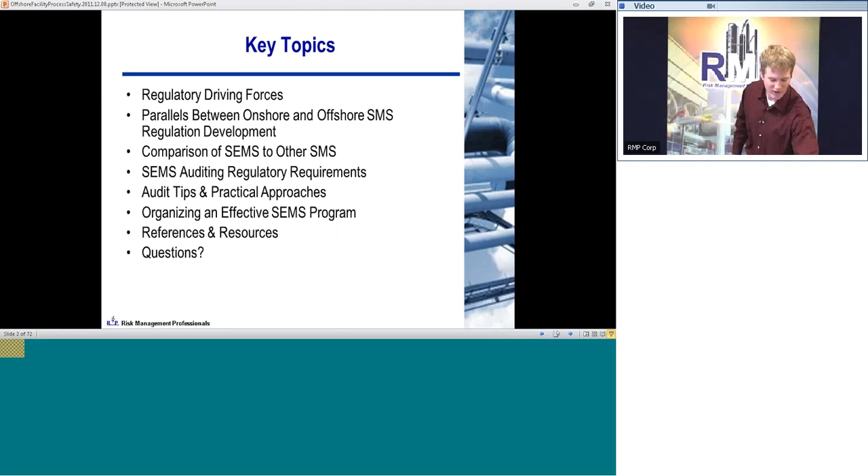Oh, sorry, I'm going to try and fix that.

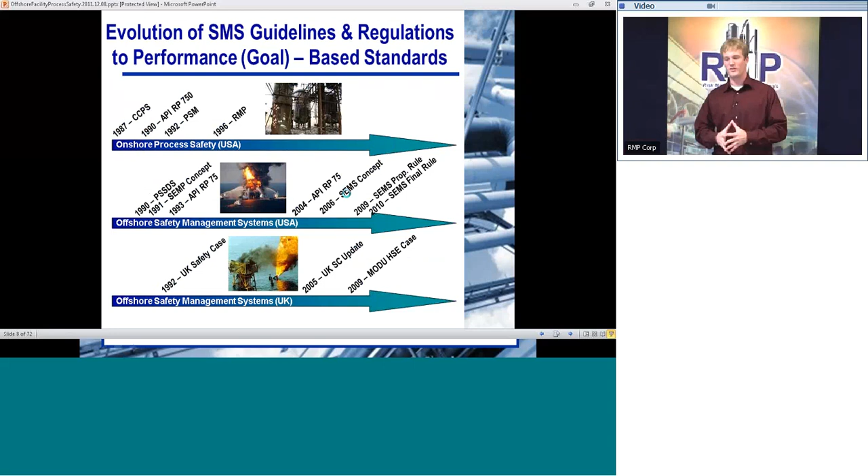Okay, and then if we keep going, it discusses how the management system mentality was created, how it compares to our OSHA, RMP, and then also, I like this slide, so I'm going to stop on it for a second.

It shows all the SEMS elements. The ones in red, for the purpose of auditing, those are what we found tend to get the most citations during audits - your hazards analysis, MOCs, operating procedures, mechanical integrity. Those you're going to want to really focus on, keeping good records, making sure there is a culture of documentation there so you don't get in any trouble.

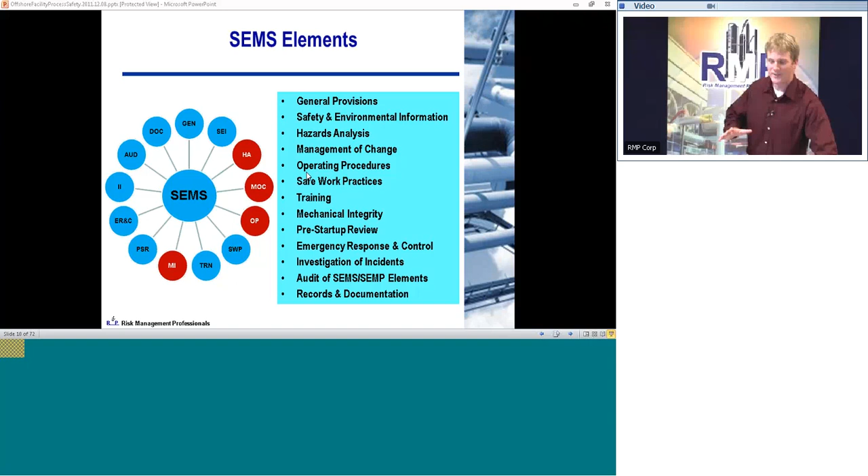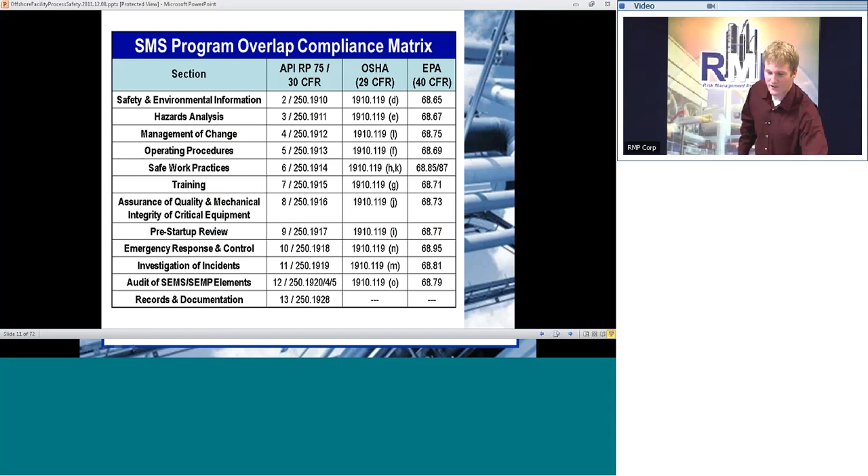Also, as we go through, this is a pretty nice matrix that you guys can look at in your own time, but it compares the different regulatory sections for the onshore and offshore, and that way it's a nice little reference for you guys. Okay, so now I'm going to get into the actual SEMS program audit requirements.

Here, for SEMS, it's going to be the same as with RMP and PSM, and that is 3-year intervals. However, it starts the second year after the initial SEMS program completion, which is a little different. That helps synchronize some of your major updates to whether they fall on the same anniversary date.

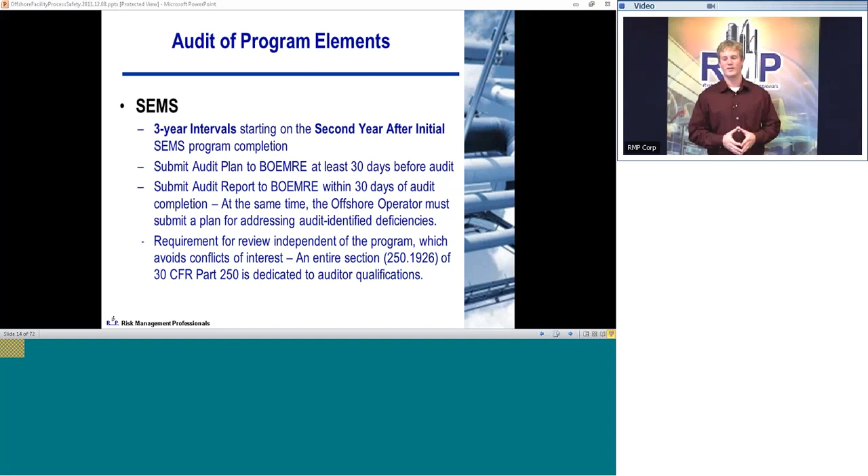Also, for the audit plan, you have to submit a plan to now BSEE at least 30 days before your audit. And then also, within 30 days after the audit, you're going to have to send back audit findings with a plan for addressing any deficiencies.

On top of that, there are some more requirements outlined in section 250.1926 that make it a little more specific in who you can pick as an auditor. You've got to make sure that they're independent. In the proposed rule, which I'm about to talk about, they go even further than that. You've got to make sure there is a neutral, independent, objective layer auditing your program, and not necessarily someone who put it together in the first place.

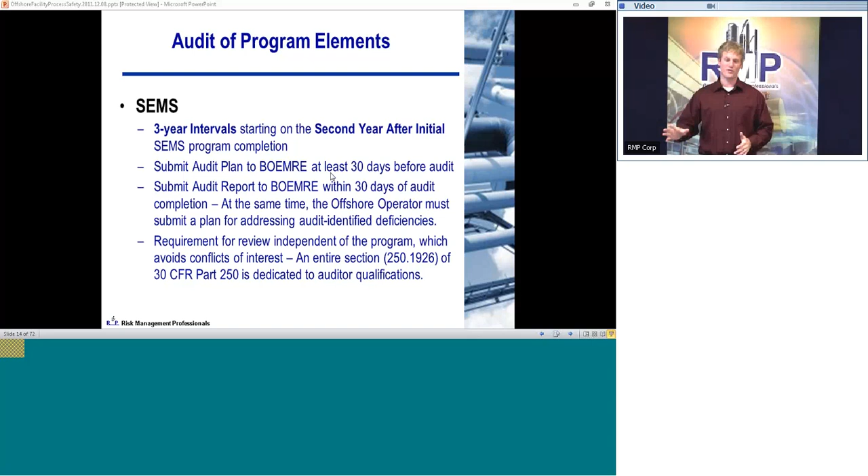It's kind of like after you proofread your own report 100 times, you're not going to see what's missing. You need someone else to come in and really do the auditing for you, either internal or external. However, looking at the proposed rule, that actually removes the option of using qualified operator personnel. So now it's going to be only independent third party that can perform the audit.

Okay, let's see if this works. All right, okay, so now I got my clicker back. All right, so we were looking at the proposed rule. What's going to change? No longer will an operator be allowed to perform the audit themselves. They're going to have to hire an independent third party.

On top of that, you're going to have to send to the BSEE your nomination for who will perform the audit, along with their qualifications, their experience, and then the BSEE will have to approve that audit. So that has to be done at least 30 days prior.

And then also, the auditor may not be involved in the development or the maintenance of the SEMS program. So from my reading of the rule, that means auditor or the organization. So if you have a consultant that does the audit, that organization cannot help in the maintenance and or development - that really provides a layer of independent objective analysis to your SEMS program.

And then, of course, looking at just the onshore PSM RMP, it's just triennial audits, and you have to retain the 2 most recent compliance audits. So it's a lot less prescriptive in that regard.

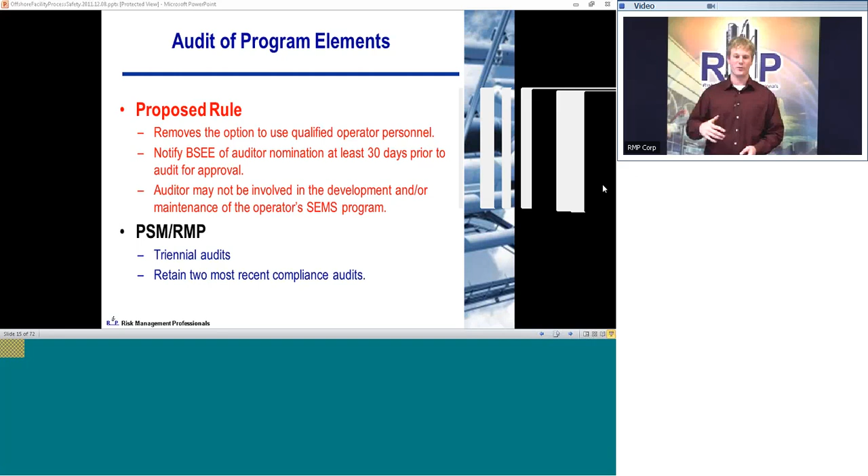So let's keep going. Now let's look at all of the SEMS elements. As I go through, I'll talk about some things that you can do for each element as an auditor, what you can ask for when you're on site, when you're interviewing someone. There are some good questions to ask, and also as an operator, good ways to make sure you're prepared so you don't have too much catch-up to do when it comes to your audit findings.

Okay, so first section: safety environmental. As an auditor, you're going to want to request this before you even get on site. This will help you get a nice lay of the land. You have arrangement drawings, structural drawings, you can get a layout, look at the levels, get an idea of major equipment, safety systems. Operators have a safety system diagram with evacuation routes, fire extinguishers, eye wash stations, fire eyes, life rafts, etc. That's good for them to have so they can hand it to you right when you get on site.

However, a lot of the information like block flow diagrams, P&IDs, all that stuff, as an auditor you can look at before you even get there. That way you don't have to waste time on site flipping through all that preliminary information.

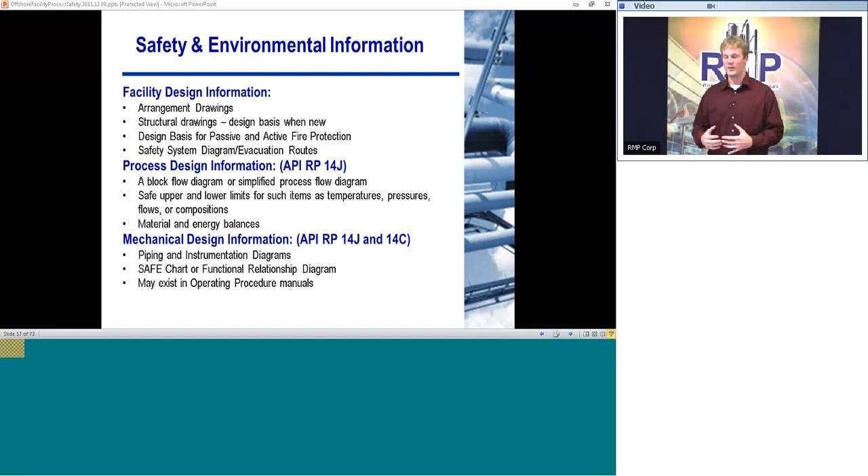Good things to look for in the P&IDs: do they look up to date? If there have been changes on the P&IDs, that could give you a nice thread. You could start examining MOCs. So, okay, I see that was changed. When you get on site, you can ask the operator, hey, where's the MOC for this? Okay, now that I have the MOC, I can follow that thread along.

How about the operating procedures? Did you do a JSA? Did you update your hazards analysis with this MOC? How about the PSR, the pre-startup review? You can follow that really well to see how their record keeping is, and see where the deficiencies lie.

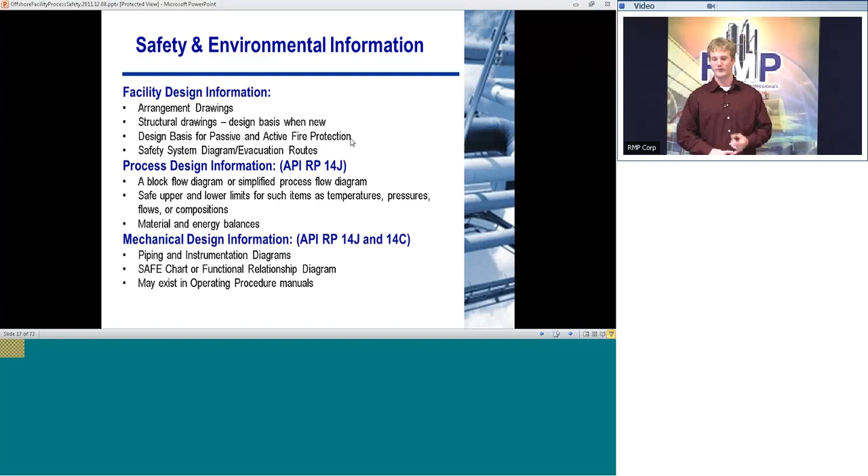Also, you can look at their existing safe charts. If we look at this example of a PFD, it gives you some good information there. You can see major pieces of equipment. As an auditor, you should have some idea of the process, and you'll know, okay, there should be safety systems there. That's something I can look at.

Same with the P&IDs. Good P&IDs, you're going to want to make sure, for instance, this PSV is labeled, has its sizing, flow rate it's designed for, and set point—that's good quality. You're going to want to make sure the P&IDs are up to date and have adequate information.

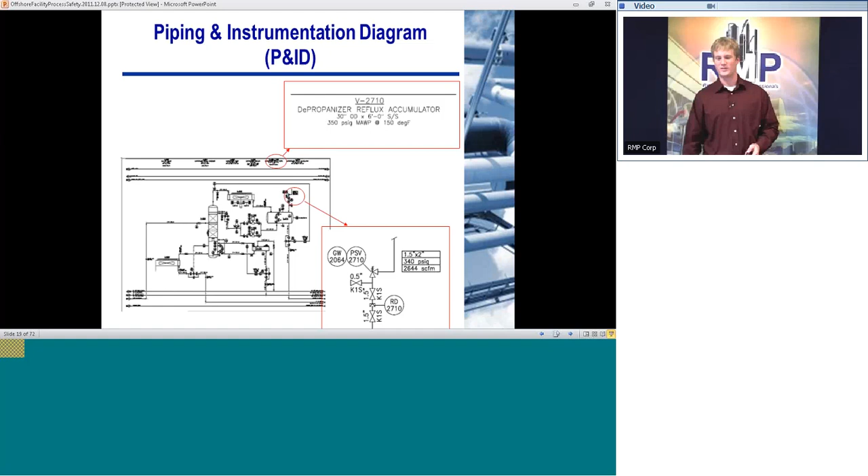And then an example of material safety data sheets, of course they've got to have those. Nowadays you've got to have MSDSs for even highlighters, I think, sometimes.

Okay, so hazards analysis—well, not as part of SEMS, but hazard analysis—this is where you have your safe charts. The proposed rule outlines a bit more in that: you want to identify your consequence, your safeguards, and have a risk rank. This is where you have your safe charts.

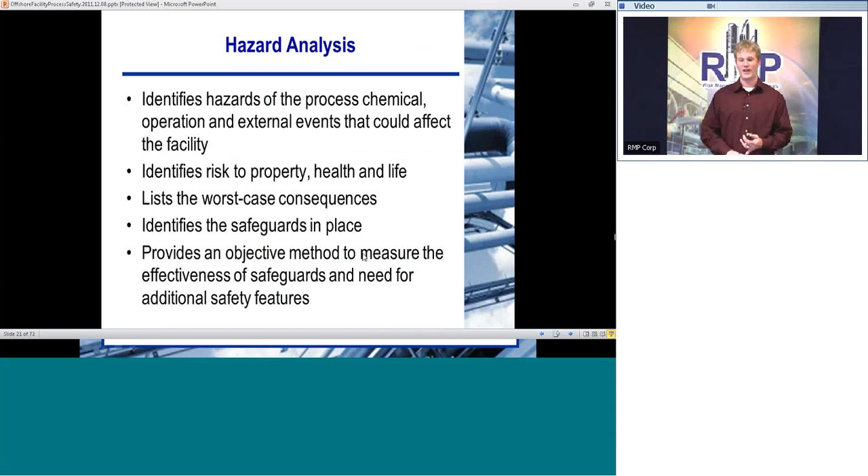You can also perform other risk analysis methodologies such as HAZOP, which on this next slide shows as you go from less effort on the left—what-if checklist combinations—to the right, where we have LOPA, fault tree analysis, event tree analysis. This graph is a little misleading in that it claims if you want to be the best you just have to do LOPA, but really, to be the best, you want to start on the left-hand side. You already want to have your HAZOP, your API RP14C review, and your simpler things done so that you can allocate your scarce resources of time to doing LOPAs and fault tree analysis on the most risky of the scenarios that have already come out of your previous hazard analysis techniques.

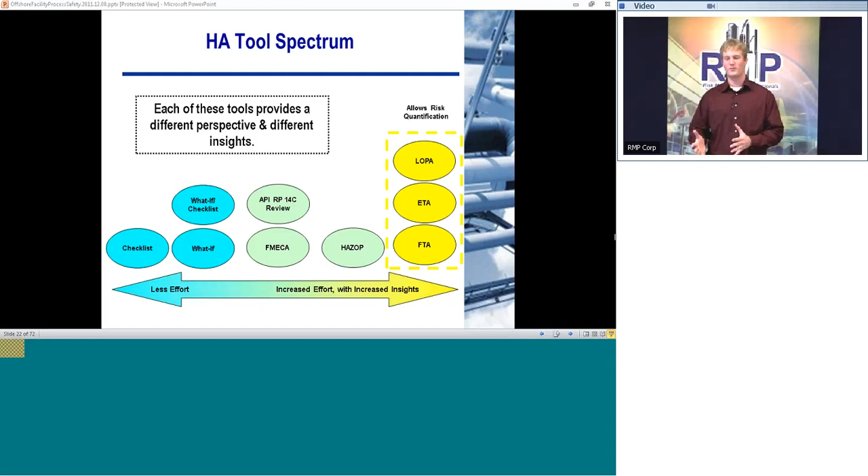All right, so management of change. As I already talked about in the safety environmental section, look for new pieces of equipment when you get on site—maybe scan around. If you see something with new sensors, a new PLC, it could be an alarm. Hey, okay, this looks like it's been replaced.

Where's the MOC for that? As an auditor, that can give you a nice forensic tool to navigate through and start looking at all the things that should have been changed as part of the MOC.

On top of that, you're going to want to make sure the entire program of management of change is in place, and that includes the process, facilities, personnel. When you change personnel, that's not something OSHA, PSM, or RMP really require MOC for, but offshore, you're going to want to do MOC on that. Maintenance workers, if you're changing the amount or any substantial change there, that requires an MOC. You're going to want to make sure the facility has those.

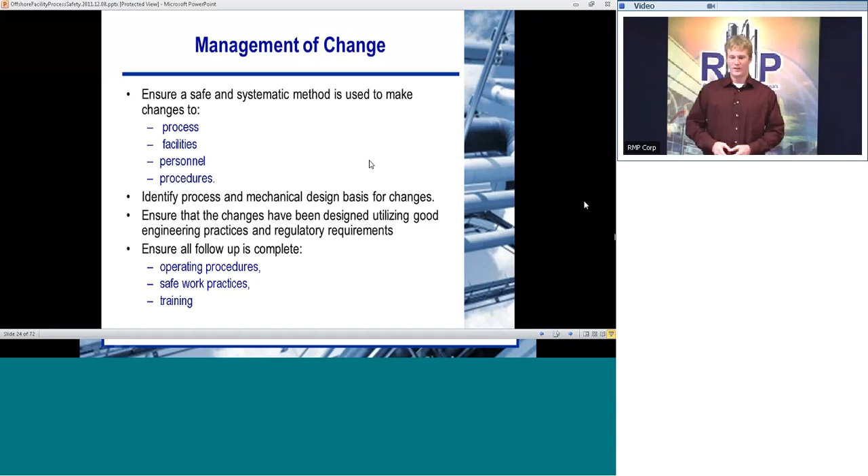Also, operating procedures, same thing. You're going to make sure they have all their operating procedures, that they've been reviewed periodically, and that they include all the required components: initial startup, normal operations, temporary operations.

A good thing to do is ask operators where the operating procedures are, how they can find them. Ask them what they think - when should they be updated, who is in charge of that in their mind. Understand, make sure not only do they have the operating procedures, but that the procedures are being followed by personnel, that they're being trained on them, that there's not a disconnect between what actually happens in real life and what your compliance workbook says.

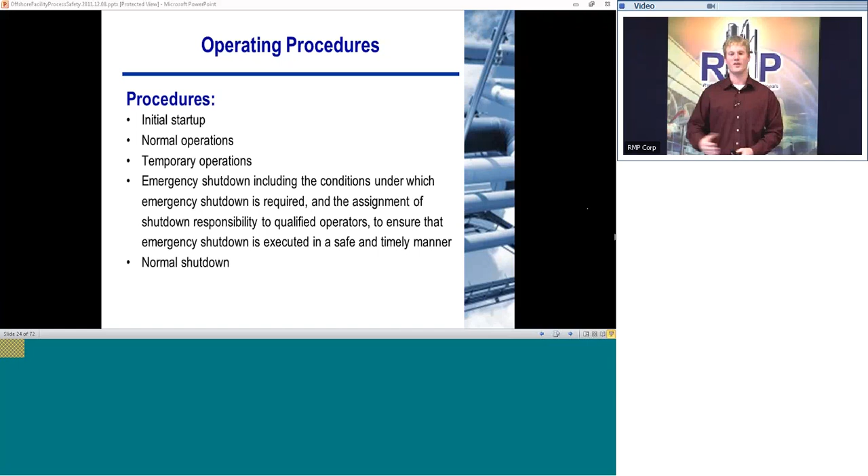That's where you can scan through when you're doing the documentation part - you're digging, you're looking for consequences of deviation, operating limits, especially if these aren't already in there, as an operator performing a compliance audit, to see where your gaps are. If you notice you don't have consequences of deviation, a good thing you can do is talk to your operators.

For now, let's look at the top 10. What are the top 10 things that could cause major hazards? They could probably give those to you pretty quickly, and in that case you can start with those and work on from there.

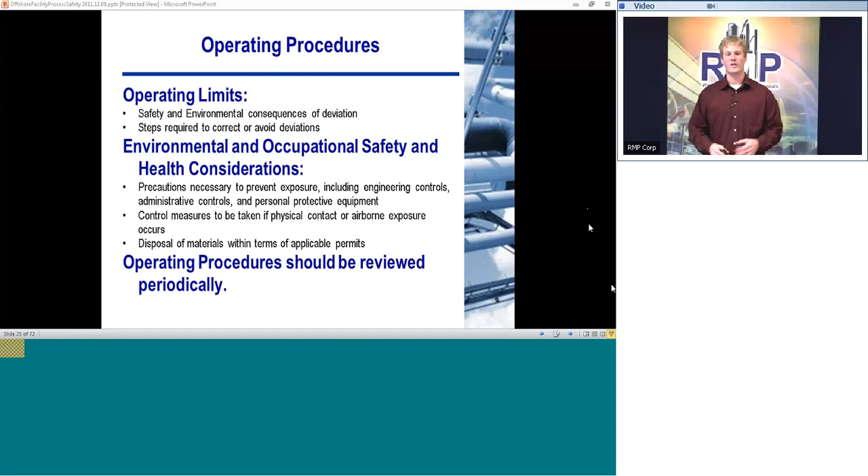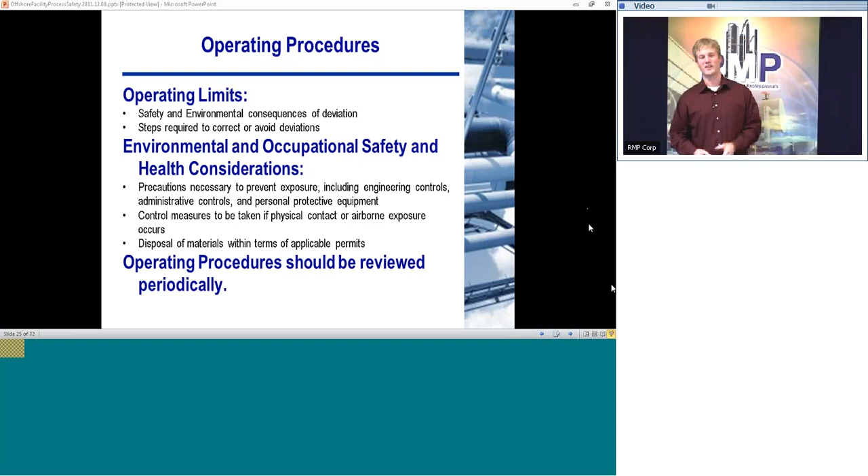Build off of that - if you shut this valve and it's going to cause a major overpressure upstream, relief valve to lift, flaring, maybe even some liquid out the flare - that's something that's in your top 10. Make sure you get that in there quick, and then set a program in place to correct these deviations, the deficiencies, as you go.

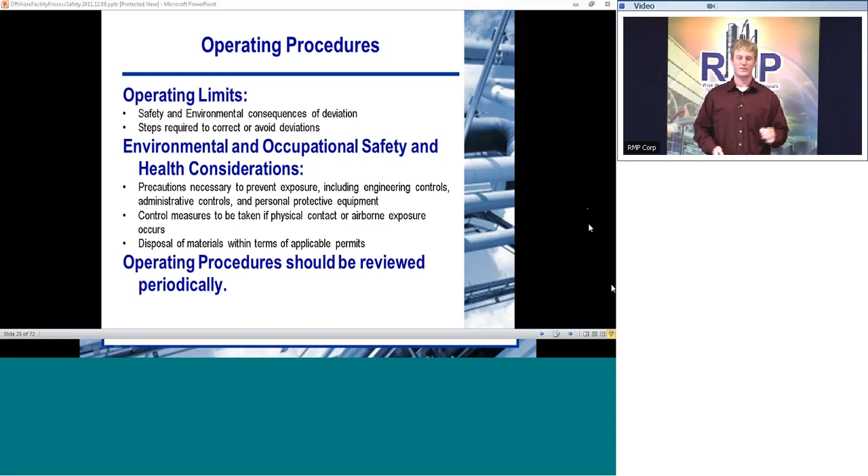All right, mechanical integrity - this is a big one. This was one of the ones marked in red on that SEMS slide I showed you earlier. This is where you get a lot of hits, and it's very important because this is what keeps your equipment - it's your documentation so that you're keeping your equipment to maintain design intent.

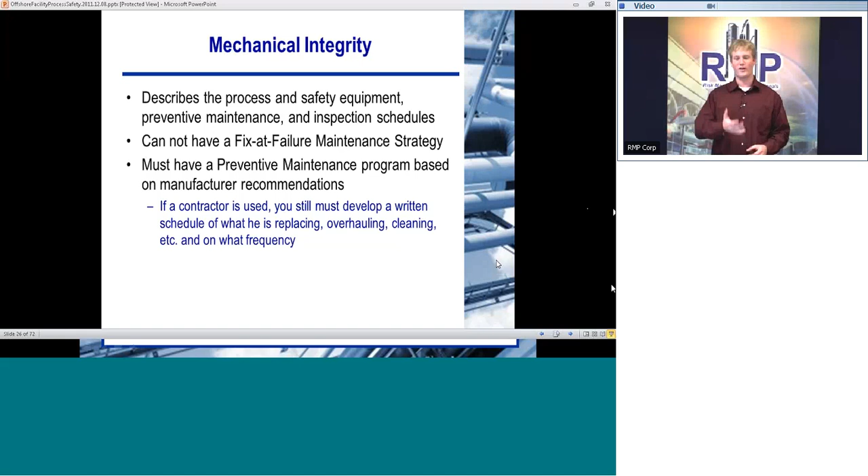Obviously you cannot have a fix-at-failure maintenance strategy - I'm sure everyone knows this, but it can't be repeated enough. You're going to want to have a preventive maintenance program that's based on manufacturer's recommendations. Also, as a mechanical integrity program, I think we have a slide right up here - all right, let me go ahead.

As it is in place, you have a feedback loop, and that way, if you're noticing certain sections that need more periodic maintenance, or the frequency needs to be increased or decreased, you have that feedback loop in place. That way you can fine-tune your program based both on manufacturer's recommendations and your own work experience. As an auditor, you're going to want to follow the chain and make sure this is happening. Anywhere it isn't, again, start by identifying the critical pieces of equipment, work on those first, and then have a culture of improvement.

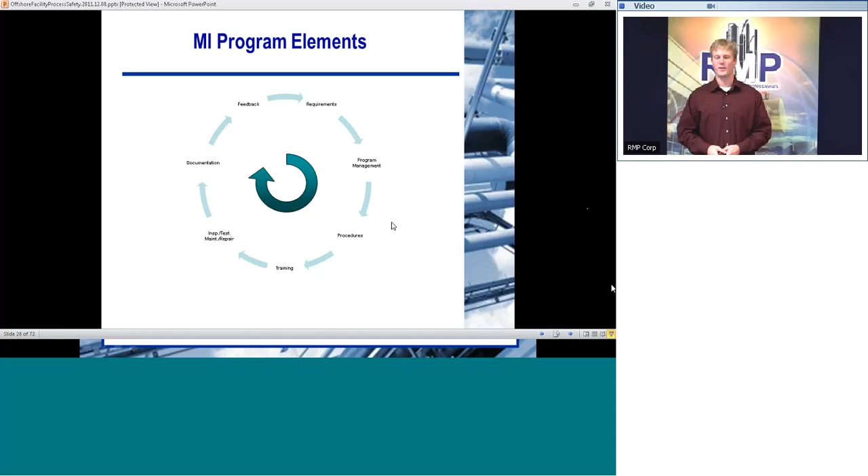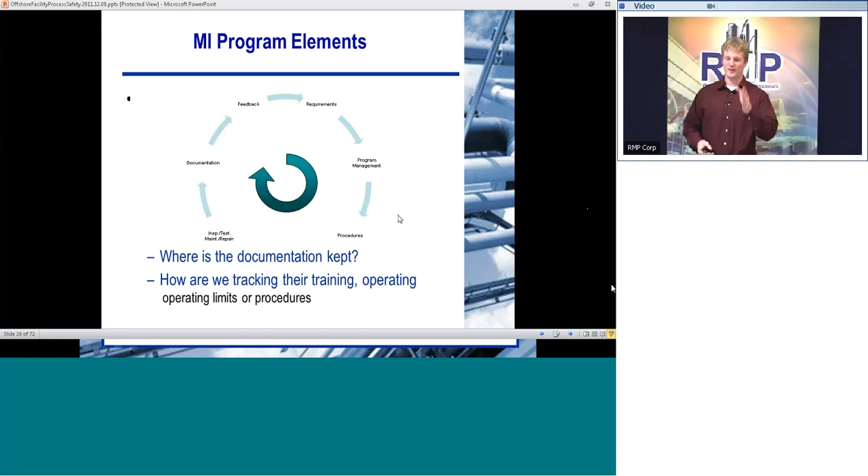The auditor comes, it's very easy to show them, hey, here are my maintenance records, here's what I've done, this is our law, these are our dates. The programs range from very complex and counterintuitive to intuitive. So when you're looking for something, you can ask people that you respect or other companies, hey, what do you guys use, and figure out a good program for that.

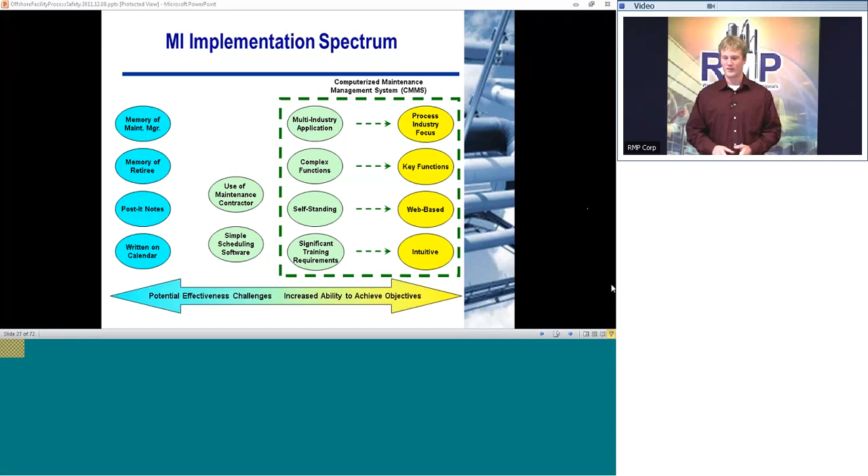This isn't required onshore, but it is required offshore. And it does say all activities in the SEMS program.

However, as an auditor, you come in, you're going to want to make sure at least, do they have JSA for the operating procedure? So you can grab an operating procedure and ask the operator, okay, show me the JSA for this. Make sure it's easily accessible. Can you ask the operator this? Do they know where it is? Do they have to go to the supervisor, who has to go to his supervisor, who finally shows you where it is? That could be a sign. Operators should be involved in this, so if they know where it is, they can locate it. That's a good starting point.

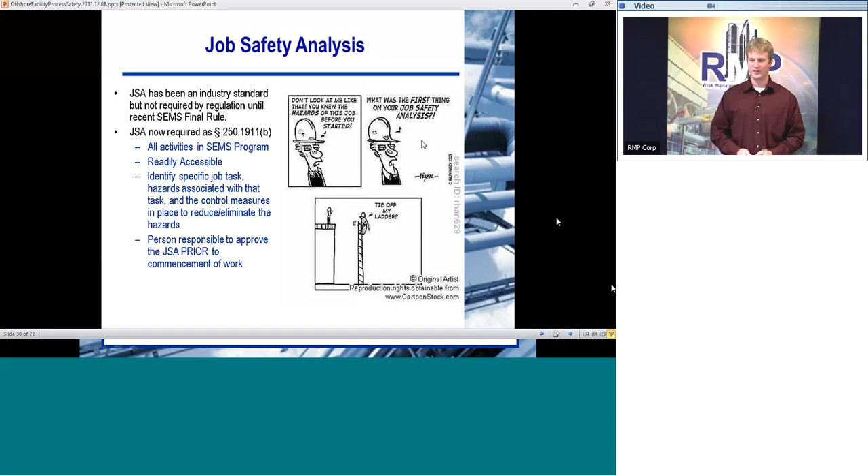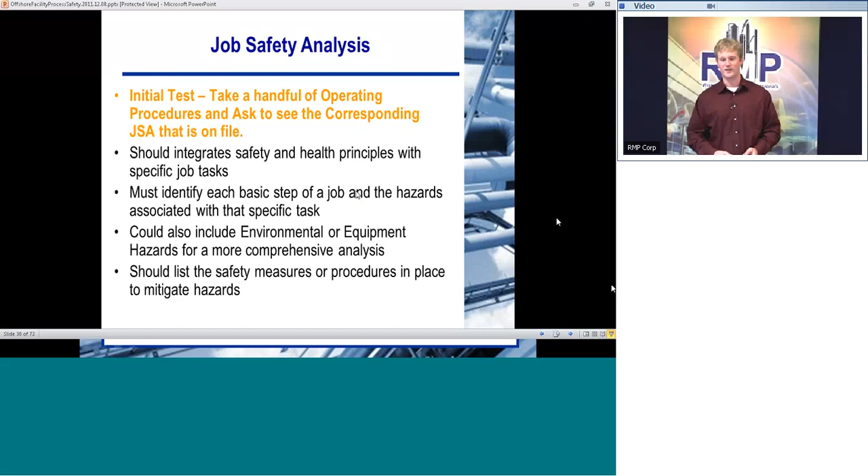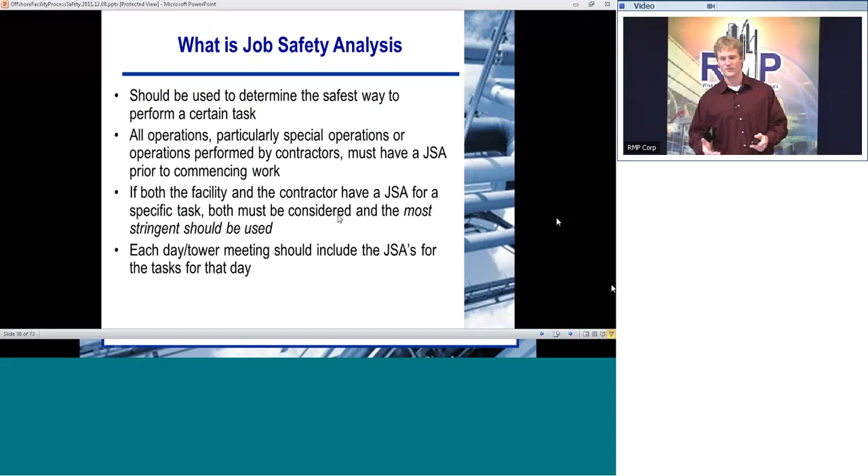Again, it outlines - okay, well it says all. What, all specific? What is it? All activities. So all operations, at least particularly special operations, any operations performed by contractors. Just because they're a contractor doesn't mean you have to ignore it. It has to have a JSA prior to commencing work. And also, if a contractor has a JSA, operator has a JSA, you've got to use the most stringent one between the two.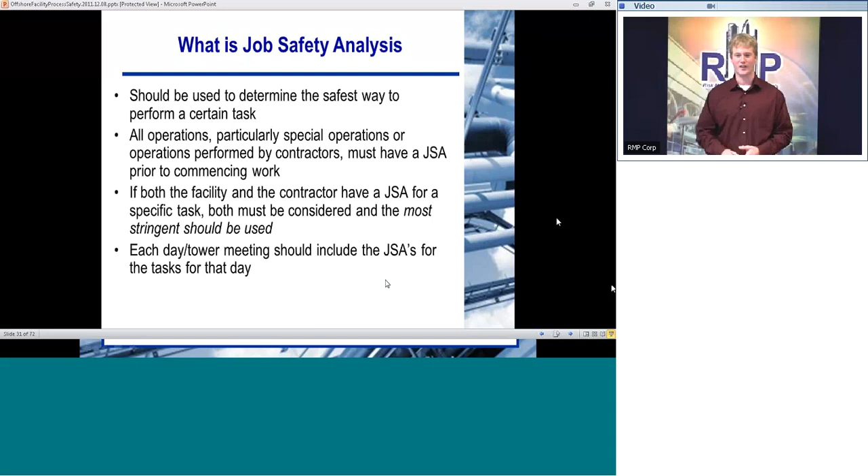And then each day, the meeting should include the JSAs for the task of that day. And I think the proposed rule also, there's going to be a sign-off. I might be wrong on that, but each day, when you include the JSAs, they need to be signed.

That's proposed. Training, next one. Most operators have training. The real thing is you're going to want to make sure that you have the documentation in place to show the auditor, or as an auditor, you're going to want to start asking questions to say, show me this operator's training records. Show me a matrix of all of your operators and what their training has been, what dates it was on, how it was performed, and when they're due next. If you can't get that, then exactly how do you know when the next time it is that you're going to have to train an operator if you don't have any records of maintaining it?

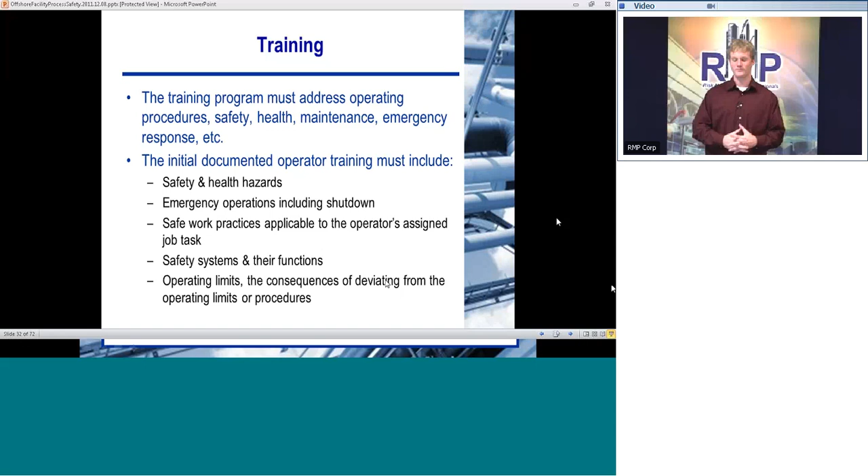Also, good questions to ask: who's in charge of making sure that everyone gets their training? You need ownership to make sure that gets done. So questions to ask: give me a list, spreadsheet, or training matrix of all personnel, including contractors.

Again, this is actually just what I was saying. If the training matrix cannot be provided, well, how do you keep track of it? And who is responsible? And then as an auditor, you're going to have to piece together all the records and information that's scattered from different places if they don't have a nice organized training system. And of course, moving forward, that should be something that the facility implements.

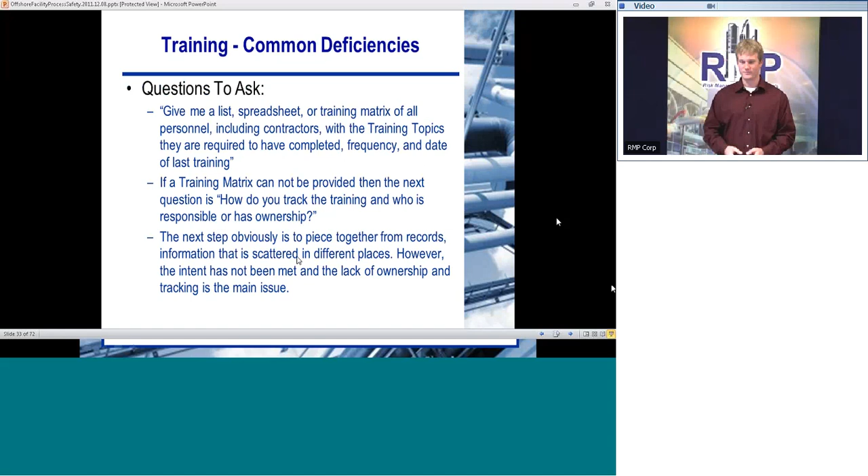Contractors - again, there is going to be, in the proposed rule, a little more information, or a little more requirements for contractors. So it's good to look at how you monitor your contractors, as you're examining your SEMS program.

Some questions to ask: can you provide a comprehensive list of the contractors used? Who is responsible for tracking their documentation? Where is documentation kept? A lot of times, especially onshore, the facility just assumes, hey, the contractor has their own procedure. If they're doing loading or unloading, they've got their own procedure on file somewhere. Well, as an auditor, you need to show me that procedure. You should keep a file of that as well, so you can verify that it is up to your standards as the operator or the owner.

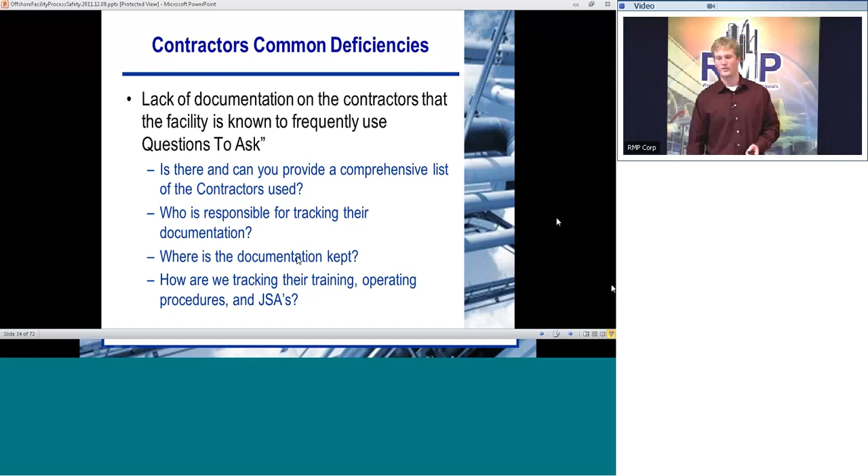Pre-startup review - again, this is kind of back to when I was talking about the MOC, following that thread along. At the very end, pre-startup safety review. So if you're looking at something that's been changed and they have an MOC for it, you want to make sure, hey, did they conduct a PSSR for this? That's a very good way to see, do they have the records? If no MOC has been completed, then there's likely no completion of a PSSR, but even if so, you could look, is there a procedure to complete the PSSR? You've got to get the proper signatures before startup. Have those been obtained? Things to look for as an auditor.

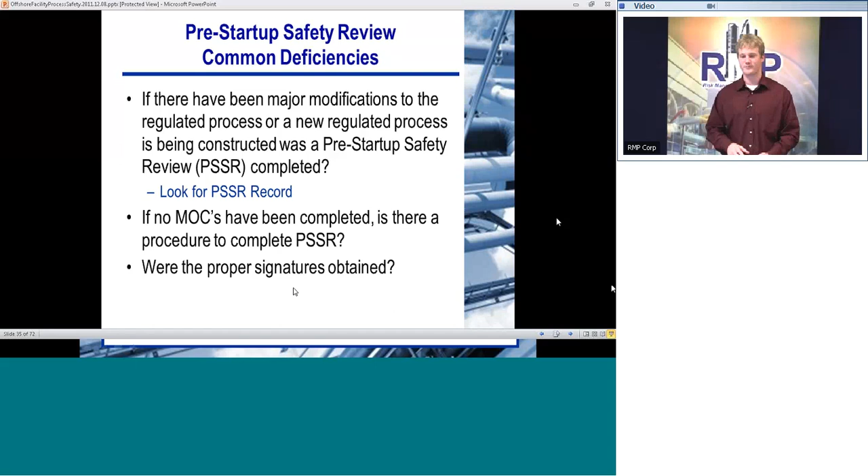Emergency response and control, common deficiencies. This one, especially onshore, can be pretty bad, to where you go in, they show you the documents, and they're all in this old binder. It's outdated. They don't even have electronic copies, so if they want to update it, they can't anyways. So that's something to look for as an auditor. Are the phone numbers up to date? Are the people that are listed, do they still work for the facility? Make sure all that stuff is up to date.

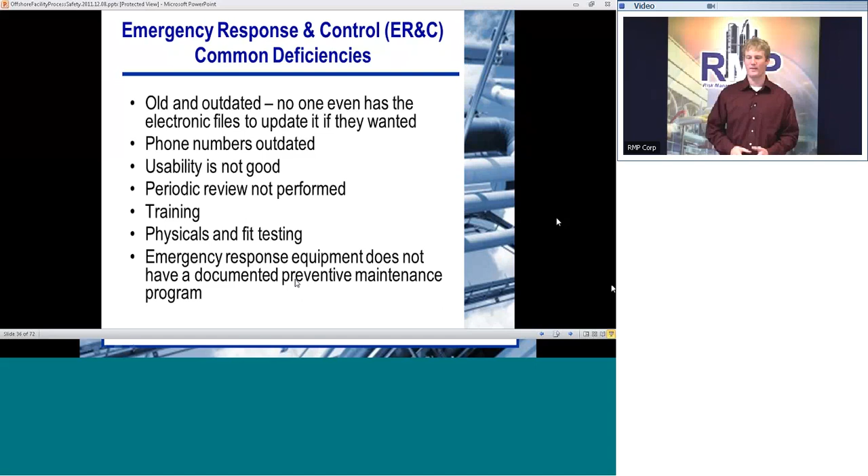Is there training, physicals and fit testing, and a preventive maintenance program for the emergency equipment? Does that have documentation? Probably not. But these are things you want to focus on moving forward. It's good to flesh these out now before your required audit comes up, so you can start working on filling the gaps between the current program and the one that you want to have moving forward.

Incident investigation - this one also, I've noticed a lot of deficiencies onshore. When you perform an incident investigation, you're looking for the root cause, and then if there are needs for improvement, identify those. That's where the disconnect comes in. If the equipment wasn't maintained properly, why? Why wasn't it maintained properly? The PSV lifting wasn't the cause, obviously. It was something that happened before that. Why were you operating that in bypass for so long?

Find the root cause. You need management of change if you're operating something in bypass. So you don't have proper control of your management of change procedures, and that was actually the root cause, not just the PSV lifting. Then ask questions: how do we learn from our mistakes, and what can we do moving forward? If an operator made a mistake, it's probably due to lack of training. There are ways to prevent operator mistakes by providing adequate support, resources, and training. And if you notice a trend, that's something that can be taken care of before any major incidents happen.

Also, another thing to make a point of: you don't want to have a blame fest where operators feel, hey, it's my fault, I don't want to give you accurate information or really think about the root cause of this because I don't want to get in trouble. So it's got to be kind of objective - hey, no one's going to get in trouble for this. Really make it clear, so you can encourage them to think about it without feeling like their job is on the line, or any promotions, anything like that.

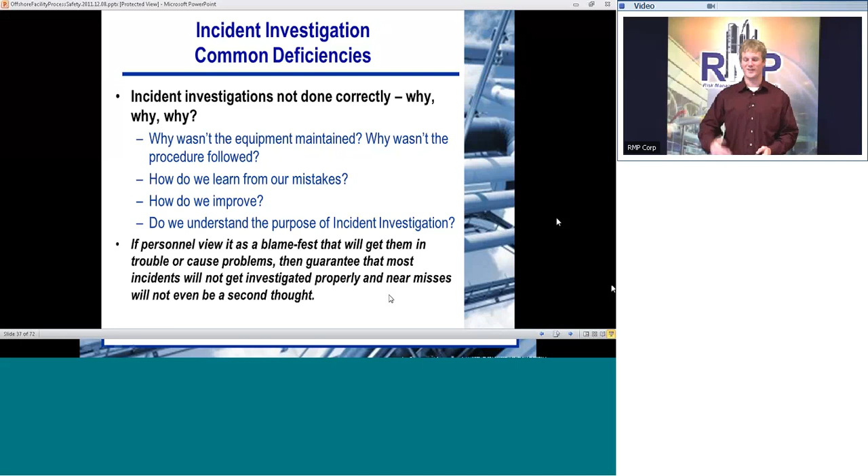Lack of follow-through on recommendations - that's another common deficiency. So maybe you made a recommendation and then nothing's ever happened with it. We're actually going to talk about recommendation tracking later on. That's also a big thing to look at.

Another thing, you've got to share your findings with the affected employees. So if you come up with this great new idea after the incident investigation, but you don't tell anyone about it, or the people that need to know, how's that going to help anyone? So you're going to want to make sure - you could have safety meetings where you go over your incidents, something like that - make sure everyone gets the benefit from the analysis.

Also, near misses - this kind of goes back to what I was talking about with not playing the blame game. You want to track your near misses, and that way you can identify potential vulnerabilities in your safety program and stop them before a major hazard occurs.

If operators don't feel safe expressing near misses or their concerns without reprisal, you might not get any information from these near misses - they might just be covered up. So you want a culture of safety, and you need to explain to operators: let's figure out exactly what your understanding of a near miss is, versus what our understanding is.

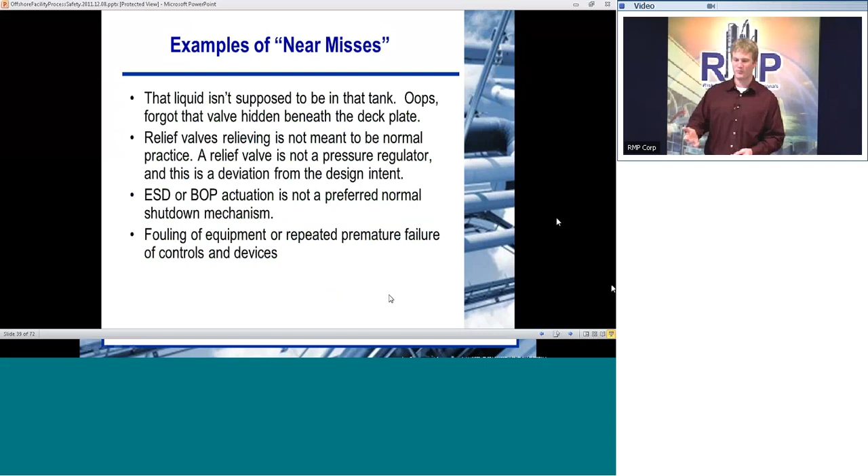That goes along with fouling of equipment or piping, repeated premature failure of controls and devices - that's stuff you want to look at.

All right, and then this next section I'll talk about program-wide deficiencies, and that's where we look at recommendation tracking.

So some major things here: no supporting documentation or proof, however people are knowledgeable. So you come in and say show me this, show me that - well, I don't have proof that I train my operators on the operating procedures, but we do, I just didn't write it down. These are easy to fix. Once you get a nice systematic way of keeping records, all those things you do now but don't get credit for, now you can document them, show them, and you're really on your way.

Another thing, on the other side, is you have a really nice compliance document, but there's a disconnect between what the document says and what the operators actually do. That's where, when the auditor comes in, you're asking questions - show me this, show me that. Like, when are you supposed to update this section?

Where are your JSAs? As you ask these questions you realize that the book says everything it needs to say, but the field personnel don't really have that connection with it, and they're doing something totally different. So that's also something you want to notice, and implementing that safety culture and management is going to help bring these two sides together.

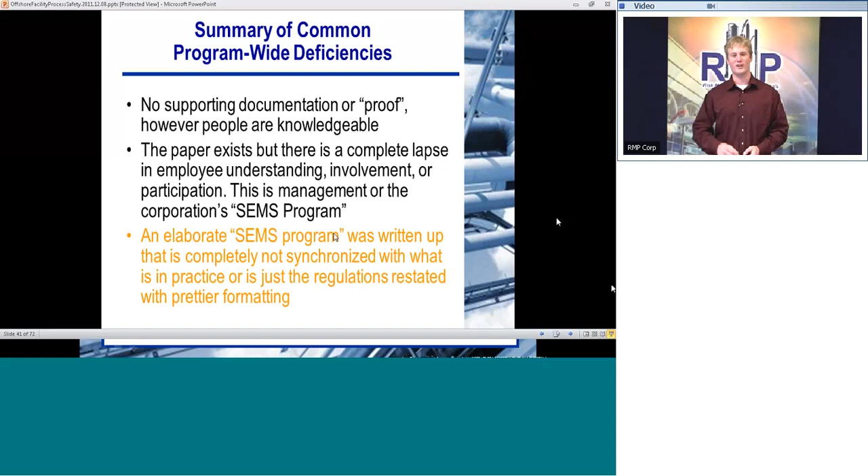Okay, so this is especially true offshore: real-time documentation. That's where I was talking earlier about paper files - it's going to be really hard for you to keep track of that, especially with multiple offshore facilities. Electronic - even if you just scan them in and store them on a server - that way people can access them anywhere, and it's very easy to pull them out.

Web-based software is a similar system, just easier to navigate by clicking on the folders. And again, on land or at sea, everyone can access all your records, all your programs, for easy updates.

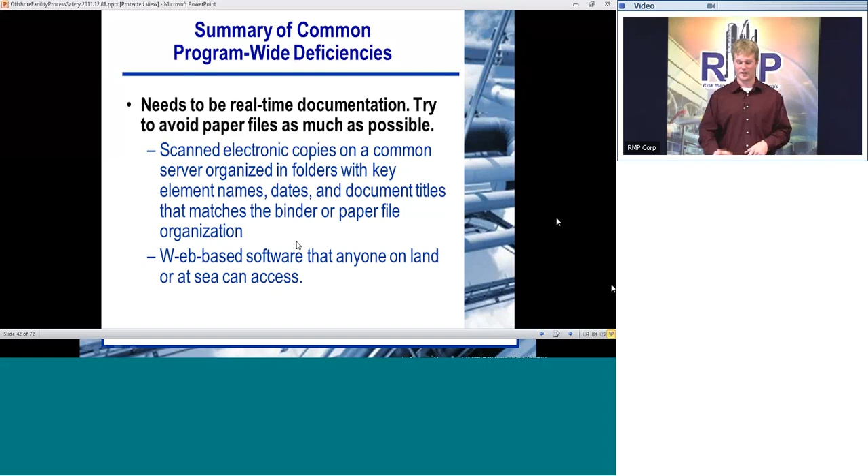And then again, big one, recommendation follow-through. As an auditor, you want to look for who has ownership of making sure recommendations get followed through on. What is the mechanism for compiling all of them from all the different components?

Hazard analysis generates its own recommendations. MOC will have recommendations. All of the audits are going to have recommendations. JSAs, incident investigations, these all got to get compiled and tracked appropriately.

How are people being reminded? Do you have realistic target dates for when these are going to be completed? Do you document that they're being completed? Do you keep this up to date?

And then on top of all of that, you want to make sure that you go back and update the document that generated the recommendation.

As an auditor, if I come in and there's a recommendation from an MOC that says do this, and then I go to the recommendation tracking log and it's closed, but you never update your MOC, well, that looks like a glaring gap to someone that's coming in and auditing you.

It doesn't look like it was closed at all. So you're going to want, once you close these out, go back and update your original documentation with that.

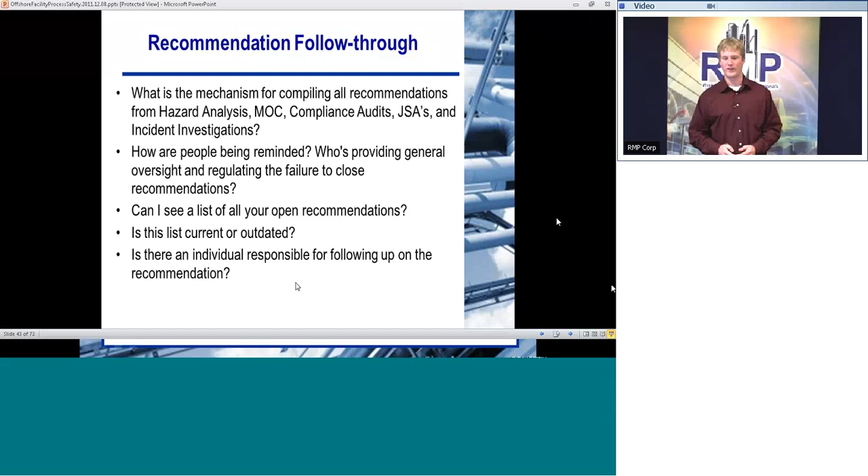As you're looking at the open recommendations, is there a target completion date to all recommendations? What were the actions taken for closing out the recommendations? Labeling it as closed and then providing a reasoning. Don't just say closed and then move on.

Even if the facility performs all the actions, if the documentation that originally stated the recommendation is not updated, it is a deficiency. That's what I was just saying. So make sure once that's closed out, you go back and you close the original document out.

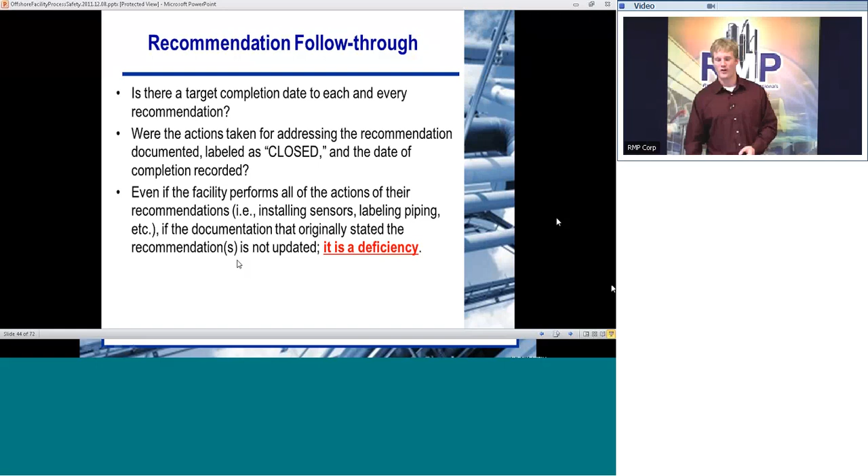Finally, if you're going to decline a recommendation, these are some generally accepted rules or bases. First, the analysis upon which the recommendation is based contains factual errors.

The recommendation is not necessary to protect the health and safety of employees and contractors. An alternative measure would provide a sufficient level of protection.

The recommendation is infeasible, and infeasible does not equal expensive. Sometimes you can generate recommendations which are just not feasible to implement, and in that case, you can go ahead and document that.

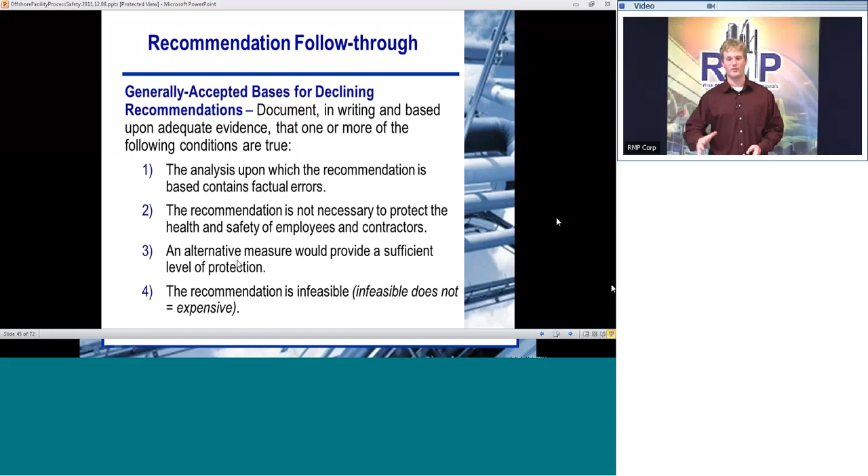Finally, we're going to just touch in on measuring program effectiveness. This is the last section of our presentation.

Examples: airline baggage handling injuries versus airplane crashes. I think everyone knows there's probably just limited correlation between the two. Same with slips, trips, and falls events compared to major accidents, limited correlation.

However, if you have a very good safety culture that reduces slips, trips, and falls, then likely a facility would also have a strong process safety culture as well.

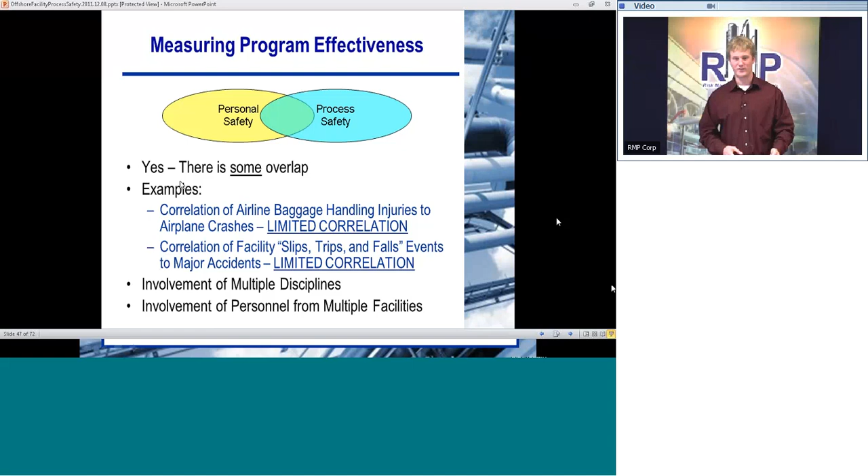Personal safety indicators, like lost time injury statistics, you can track that.

So these are things like those near misses we were talking about, PSVs lifting, ESDs actuated, things that, hey, this control valve is being corroded out because we don't realize that we're getting reverse flow of some caustic solution. It's changing.

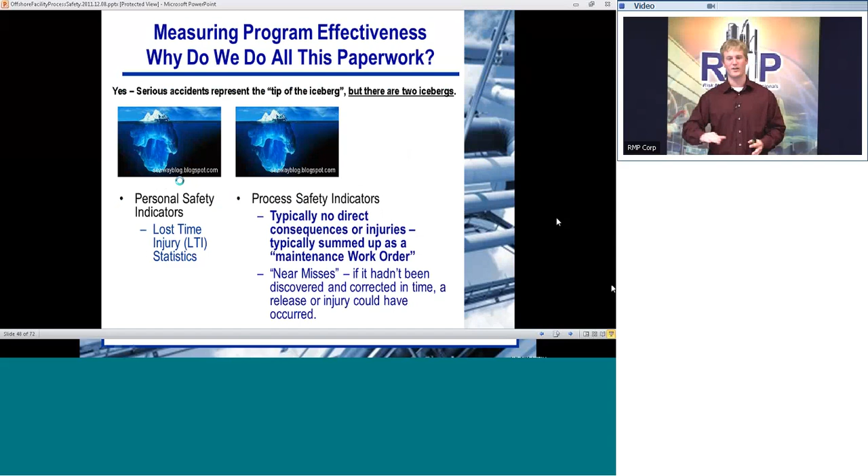So that's where you want to provide a culture that documents these near misses, and that way you can track and make sure that there's not any underlying susceptibility there that you're not catching.

So here again, process safety indicators: having to station an operator at the vessel to drain it off constantly, that's a deviation from design intent, that's a process safety indicator. Again, liquid in the wrong tank, of course, that's a process safety indicator.

Regulating via the bypass, relief valves relieving, ESDs tripping, those are all process safety indicators. And a PSV relieving, that's a near miss. That's an incident investigation too.

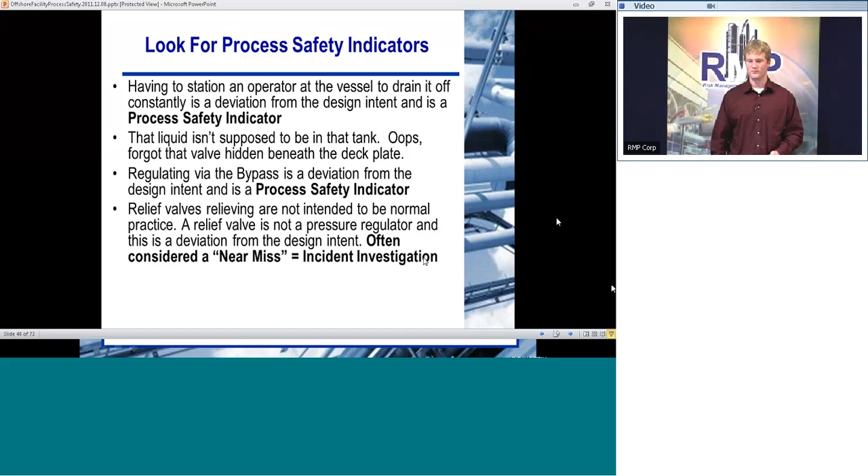Again, emergency shutdowns, equipment trips, those are not normal shutdown practices. Those are indicators that there could be something more wrong. Also, increased corrosion rates. The real answer is why. Why do you have this issue that you're noticing? And that could be a bigger problem.

Fouling of equipment, again, we talked about that. Deviation, the main point to take here, deviations from design intent lower your safety margin. What you want to do is increase the gap between the worst case scenario, not close it. By lowering your safety margin, you're closing that gap, and getting closer to having a very severe safety consequence.

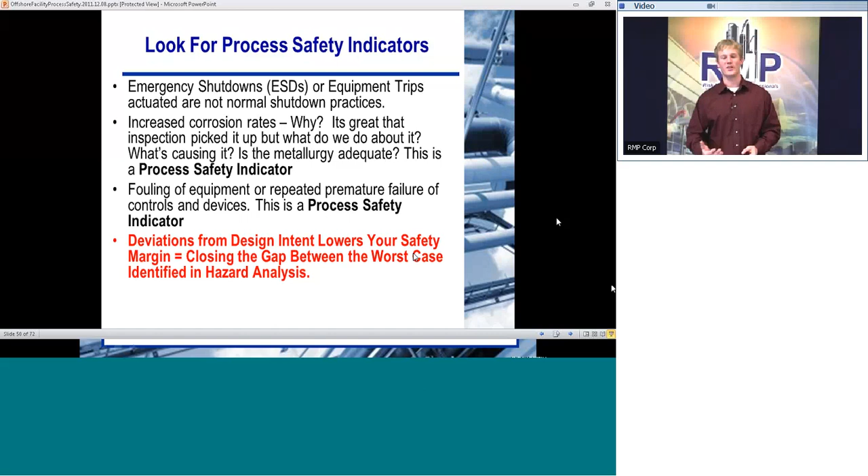All right, so here's some tips for implementation of the SEMS program and for incorporating a safety culture at your facility.

Look past the checklist. There's a difference between following a procedure to the point, and actually getting the job done, actually making things safer. Make sure that your procedures support your process, not the other way around. You don't want a process that just supports procedures.

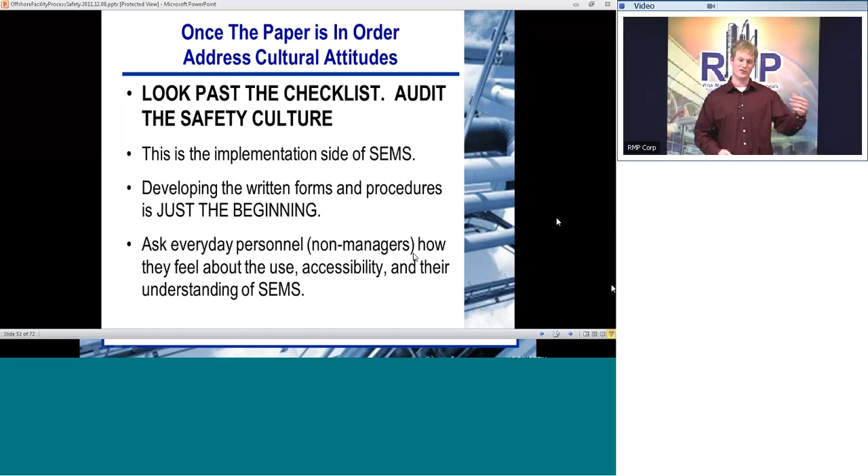Again, this is the implementation side of SEMS. If you have a lot of deficiencies, especially in your record keeping, start with the critical equipment, the major things you notice, and start implementing procedures for keeping better records and tracking these things, then work your way from there. That's just the beginning.

Oh, let's skip ahead. Okay.

Talk with everyday personnel, non-managers, about how they feel about the use, accessibility, and their understanding of SEMS. You want to make sure that, especially if you're management, you're getting feedback from managers below you, but they're the ones getting feedback from the actual operations personnel. So it's good to look at the whole range and make sure everything is synchronized between the levels.

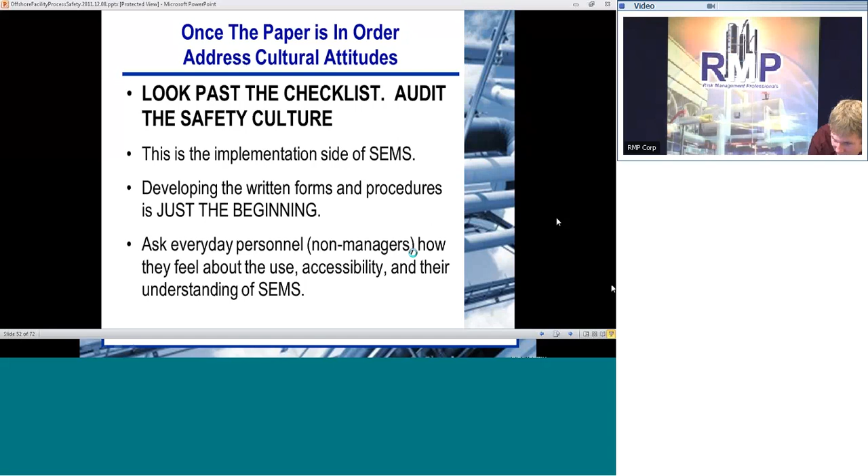Uh-oh, hold on one second. I don't know what's going on there. Okay, go back in. All right, sorry about that.

Again, the best way to reduce hazards and risk is changes in the underlying safety culture. It's something you just have to implement and reinforce day in, day out. If things have been done a certain way for a long time, it's not brainwashing, but you really have to focus on the change. You have to be stubborn, determined, and implement this new culture. It's not just creating a procedure and moving on, you want to make sure this is enforced.

Again, things to note: people do not inherently want to put themselves, coworkers, and the environment at risk. It's not that if you tell someone, hey, do this, it's good for safety, they're going to refuse. It's more that if they're not given adequate resources or adequate understanding of why this benefits them and helps with safety, then maybe they won't be as inclined to work on that.

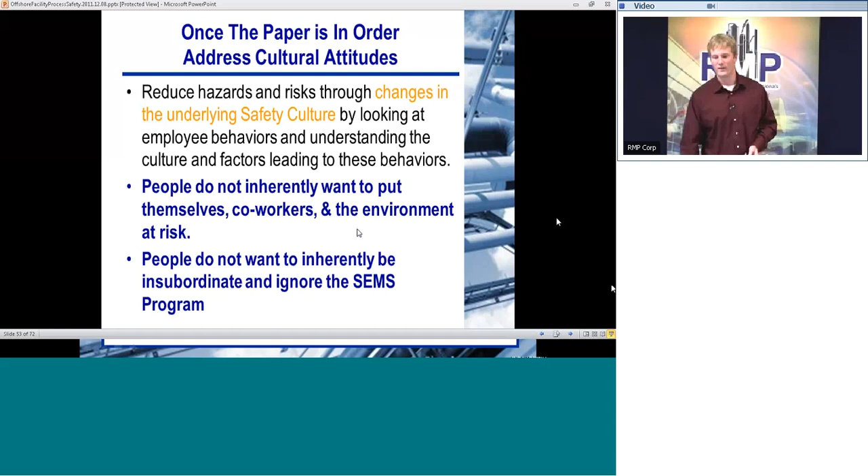Also, pay attention to the influence that managers, systems, and practices have on at-risk behavior and conditions. That's where you have the whole culture of safety, you need buy-in from the top all the way down to the bottom. If you have buy-in from the top and in the middle, then the bottom is really going to feel that everyone's taking this seriously, so I'm going to do my part.

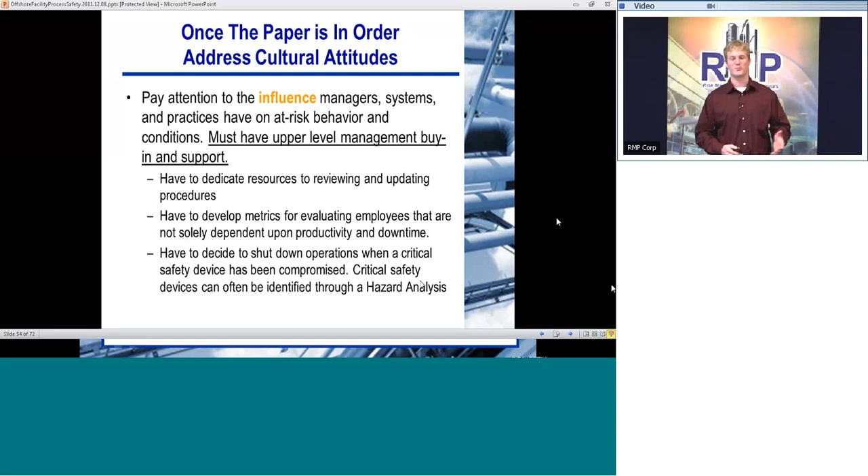As part of that, you've got to dedicate resources to reviewing and updating procedures, giving people time. If you give someone a task but don't give them the time to do it, they might not get it done, you're putting them in a no-win situation. So providing them the resources, the time, or otherwise to implement these safety systems is a very good step toward implementing a safety culture.

Also, SEMS tools for identifying at-risk behaviors include things like process hazard analysis, compliance audits, and incident investigation. All of these are good because you get bottom level support and feedback. For incident investigation, you need to interview operators, you might even have some on your team. Same with compliance audits, you can talk with the operators.

For process hazard analysis, you've got to have some people from operations involved, and you're able to get feedback not only from the engineers who operate or design it, but also from the operations folks, like how does this actually get operated, is there a disconnect? A lot of times you see a disconnect between what people think is happening versus how it's actually being operated, and it's a nice time, sometimes one of the only times, that they can really talk about it and get a solution.

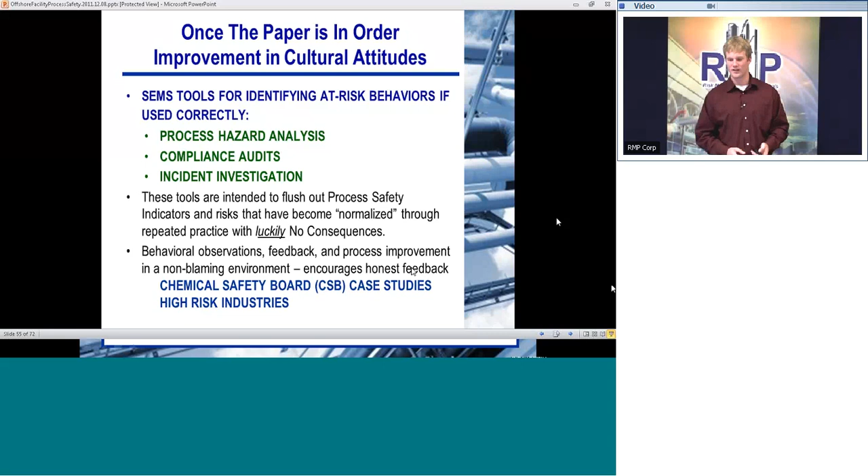When you're doing this, it's got to be in a non-blaming environment. Encourage honest feedback and allow everyone to move forward. Especially when we do process hazard analysis, we encourage operators: this is your time, you've got a voice, this is when you can really state your opinion. If you have recommendations that are needed, they can move their way up for management to review. By encouraging that and making sure they're in a safe zone, we can really get the most benefit out of these sessions.

Okay, looking for cultural behaviors that erode safety. So this is on the other side of the fence. What could you be doing, or what do people do that maybe they don't notice, but that could actually have a detrimental effect on safety?

Like I said, with incident investigations, if you don't actually identify the root cause, then they're not going to be as beneficial to you, because you're not going to be learning from your mistakes as well as you could if you really dug deep and figured out what went wrong, what was the cause behind it, and how do we fix the cause, not the symptoms.

And it's not people that are just unwilling to follow procedures, perform record keeping, and work safely. Normally that's not the case. They don't have the time. There's not enough time allocated for doing those tasks, so something gives eventually.

Lack of resources, again, normally time or money or manpower. Tools and mechanisms could be simplified - this keeps changing on me. And then at the bottom, lack of understanding or training. If you don't train them on the program, how to make sure it's updated, then things can fall through the cracks. Informal pressures like a performance-oriented culture in which employees are praised for saving time and taking shortcuts.

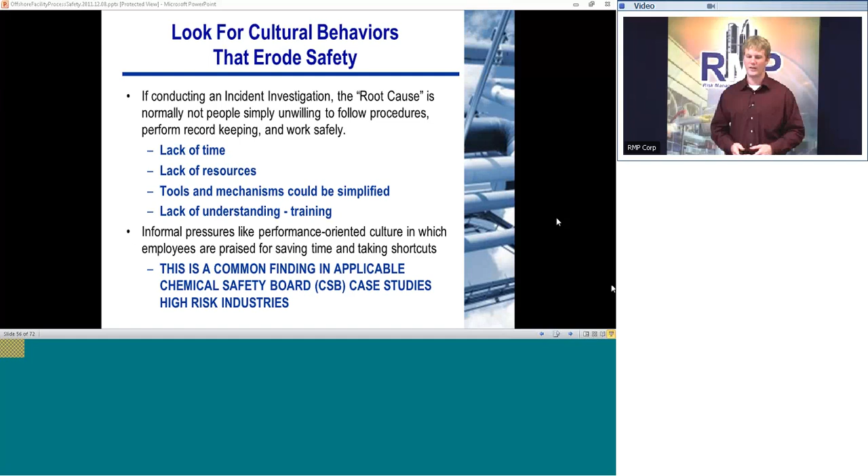All right, so example here. You notice mechanical integrity is not maintained, so maybe there's inadequate maintenance staff or parts to close the work orders. Were the required approvals for shutdown or turnaround denied? When personnel identified an incident or near miss, are they received with open-mindedness? All of these things - if you treat it right, you can really make genuine improvements. If you treat it wrong, then you can really limit the efficiency and the valuableness of your program.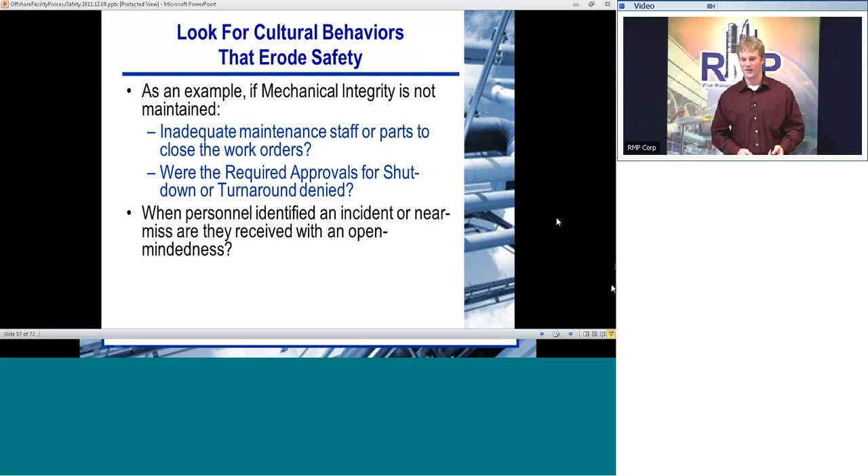In audit recommendations, they need to consider the root cause. So why is the procedure, form, or policy not being implemented? Is it too cumbersome or confusing? Does it fold easily into their operations and day-to-day activities?

Lack of resources - so nobody is available to redline and CAD the piping and instrumentation diagrams, or time for personnel to update operating procedures is not supported. These all need to be looked at, and you really need to find a way to provide the resources to improve your program, and also at the same time, when you think about improvements, make sure they're practical and that they can be implemented on the operations level.

Sometimes if it gets too fancy, it can be hard to actually monitor and work with daily. We don't want to make it too difficult, too much friction for the personnel to actually use.

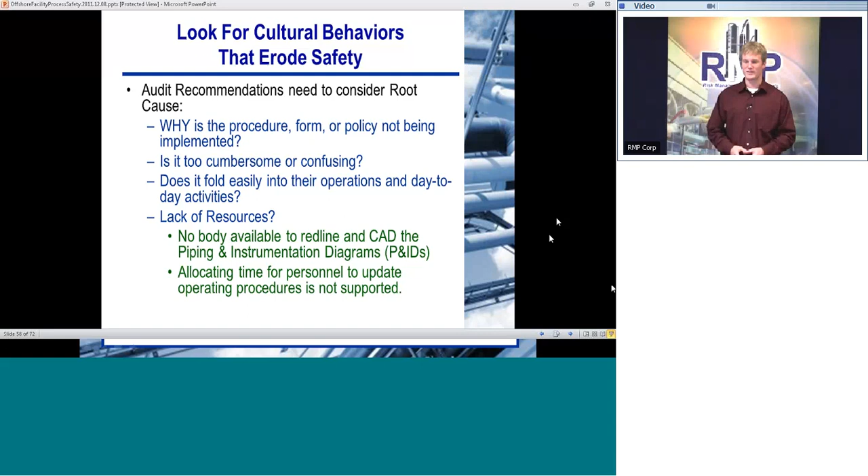For compliance audit closure, once you have an audit, review the initial results with the individuals that participated. Everyone's in agreement - brainstorm in a no-blaming environment how to improve your program and address the deficiencies. And really stress the fact that SEMS implementation is a function of the overall safety culture of the company. It's not something the company does alone - corporation management has to have their support so you can go ahead and implement this and make sure it works for you.

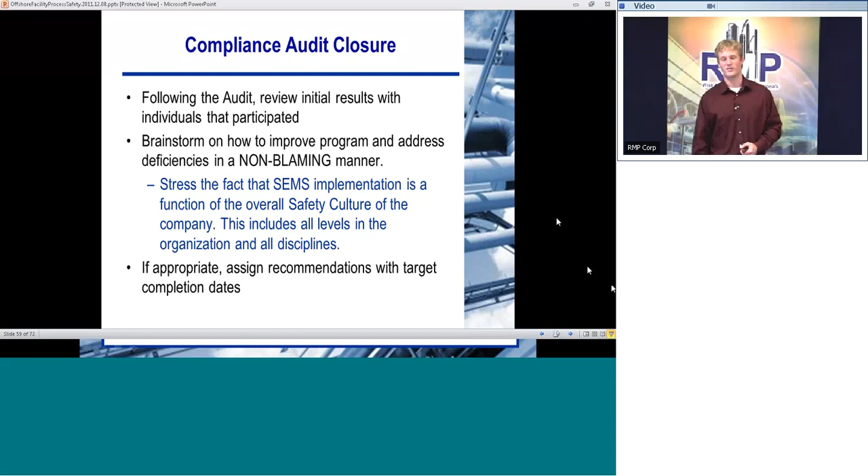And then, if appropriate, make sure those recommendations have target completion dates. That way, you can have a final closure and they don't get strung out too long. I've seen recommendations that have been closed in 7, 8 years.

SEMS lifecycle, and again this is stressed throughout, but the program is a whole life cycle. It's not just one and you're done. They're living documents. So once you develop, you implement, and then through compliance audits you can evaluate their effectiveness, develop procedures for improving the deficiencies, and then once you implement those you can go back through and iterate. The best way, since some of these systems are complex, is to just iterate, keep improving, keep working towards a higher goal.

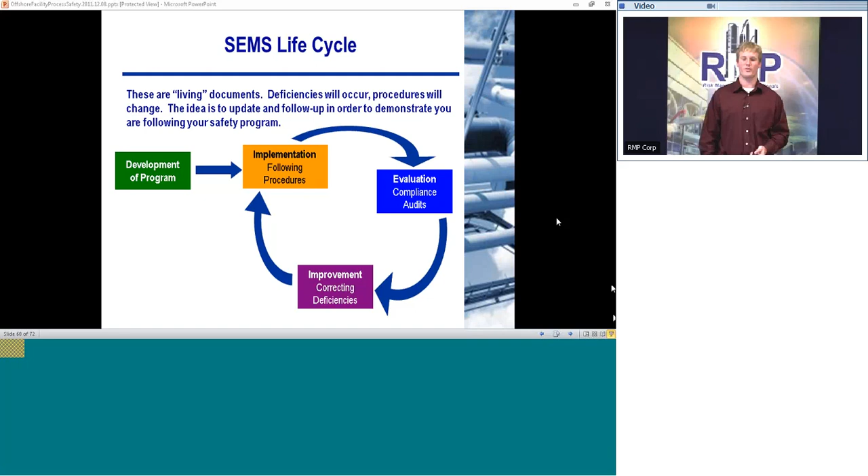Okay, so we've got one more section here: organizing an effective SEMS program. This has to be done by November 15th, 2011. So hopefully that's already been done and no one's delinquent on that.

Bulk of the elements are common to other loss prevention programs we've talked about earlier, like PSM, RMP, and other statewide accidental release prevention programs. One benefit is you can tap in, especially if your company has offshore and onshore assets, to those onshore assets and talk with those people to get good ideas for implementing it offshore, since they've been doing that for a long time. That way you don't have to start from scratch; you can use what you've already built up and just apply it.

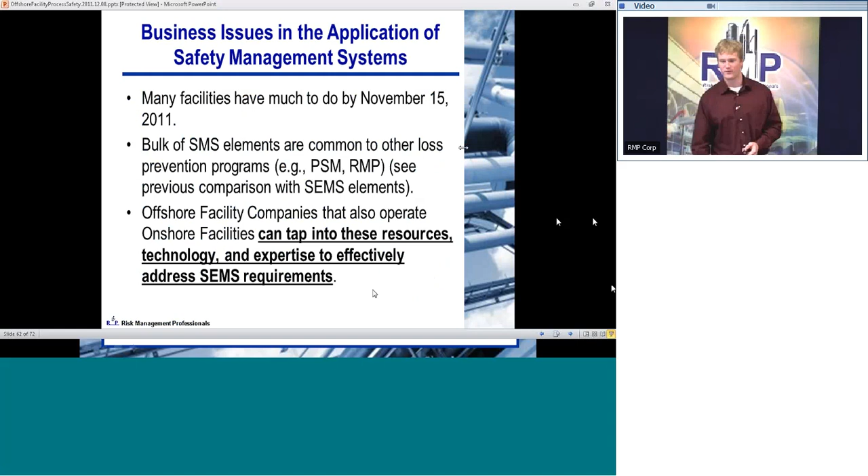So again, a broad spectrum of activities are encompassed by SEMS, and you really want to integrate your program into what you already do to minimize duplication. That way you don't have your normal programs that everyone follows separately, and then have to periodically add those to a separate program you keep just for SEMS. You can integrate everything into one, which makes it more streamlined and seamless.

And again, start simple. You can talk with your onshore assets for some ideas, but weave what you already do, since you have a lot of this done, into the new programs, and then look at where you're deficient. So, a gap analysis, essentially, what do we have and what do we need? Then as necessary you can create ways to update and iterate on that program to make improvements.

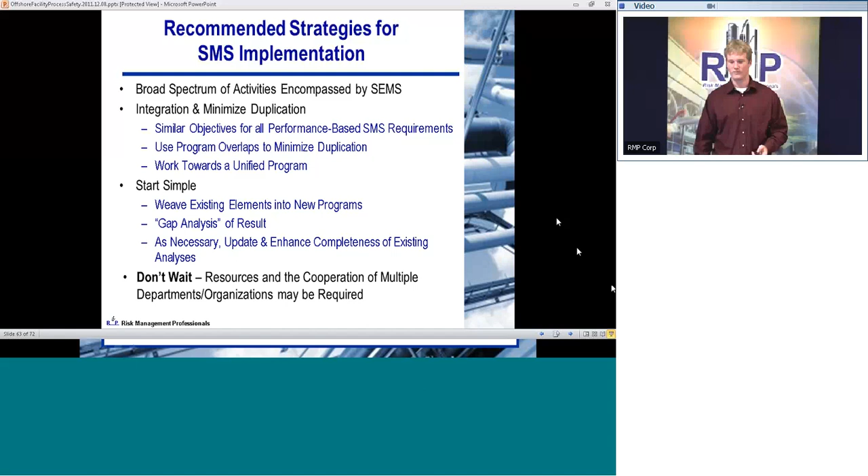Okay, so before I finish, these are some current events you guys can look at. Most of these are online, but the Offshore Operators Committee is developing a tool for audit. API is developing a list of qualified third-party consultants for audit support, which would be necessary if the proposed rule is finalized. And here's the BSEE, which took over when BOEMRE was split, now under new leadership with a Rear Admiral who just took over in December.